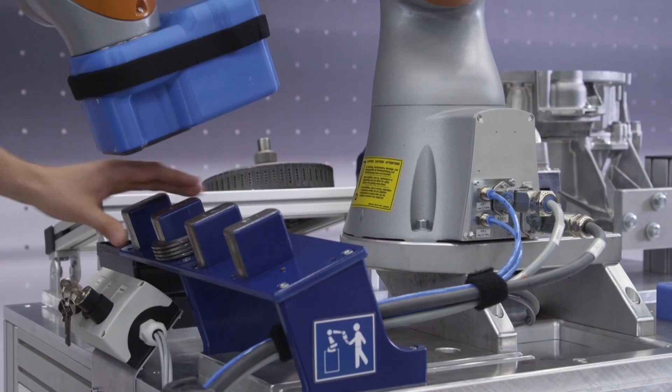Industry 4.0 explains itself. We are facing almost revolutionary change in the industry. All big trends in the automotive industry are already driven by or are driving digitalization.

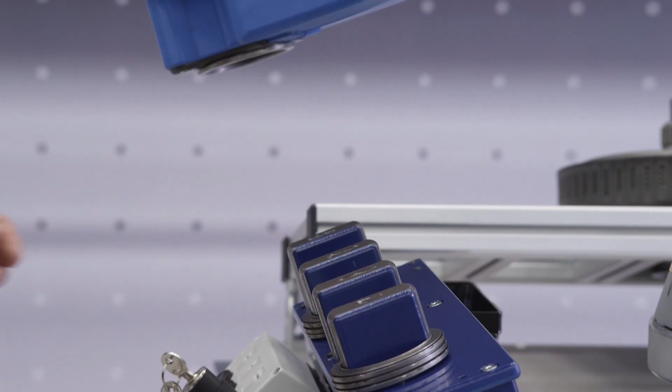Our goal is to be the leading and most innovative automotive manufacturer in the world with respect to digital technologies, and to achieve the digitalization of the entire value chain from design and development through production, where the term originates, and up to sales and service.

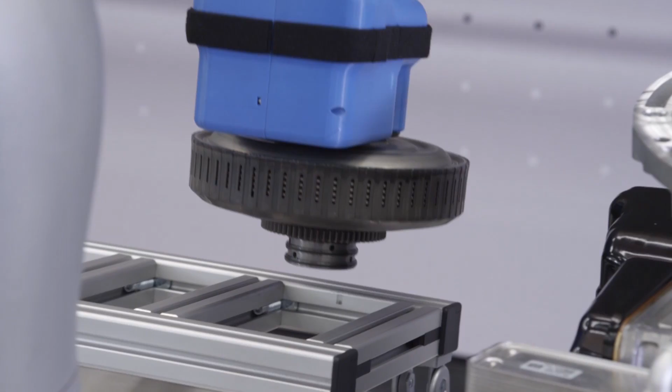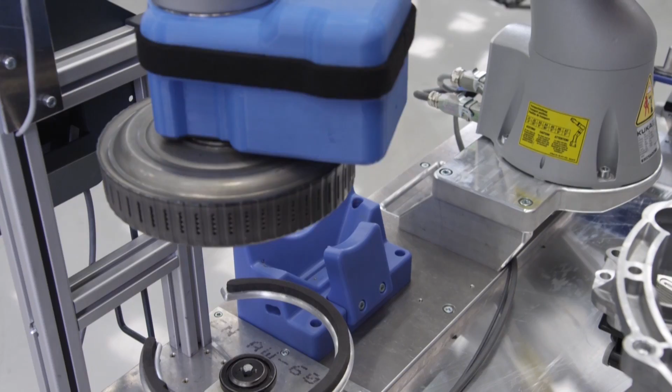The potential of the digital revolution is massive. If people, machines and industrial processes can connect intelligently, individual products can be created to a higher level of quality and more quickly. Production and manufacturing costs can be structured competitively.

We are striving toward a smart factory that offers a high level of adaptability, resource efficiency and ergonomics. And when it comes to digital technologies, we want to be the world's leading and most innovative automotive manufacturer.

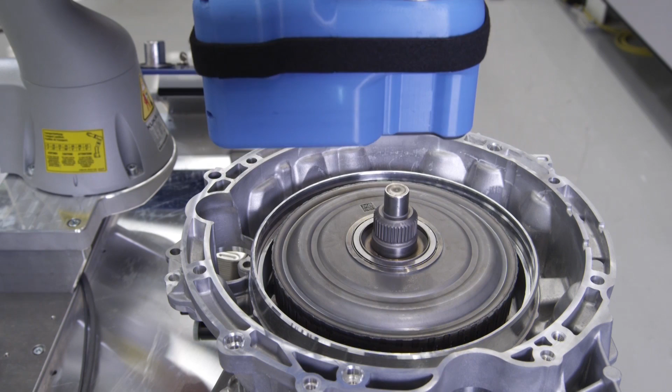In intelligent production, the adaptable manufacturing system will play a key role and will require innovative work models as to how people and robots work together. Today, an assembly step is generally performed either by employees or by robots, which are placed behind protective fences for safety reasons and can be used in other areas of production only with a great deal of work effort.

In the future, we will use real cooperation between robots and people, but with people always in control. The direct cooperation between people and robots enables combining the cognitive superiority of people with the power, endurance and reliability of robots most optimally.

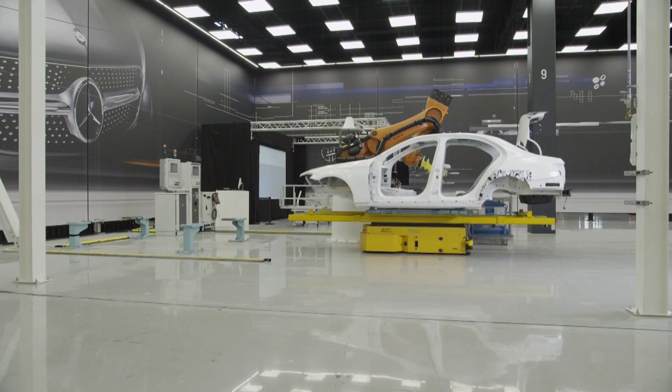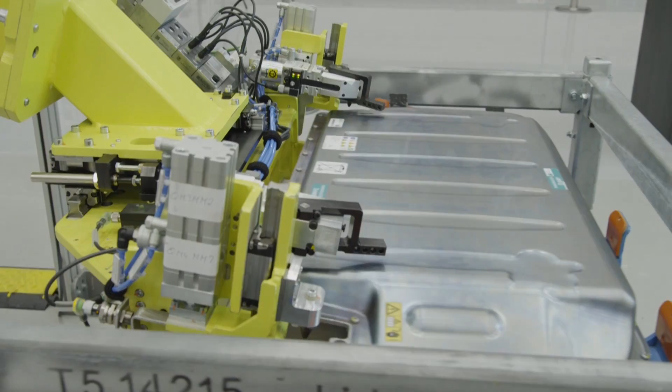Industry 4.0 offers many chances, not only for the company as a whole, but also and particularly for our employees. They are the main focus. People's experiences, creativity and flexibility will still be indispensable in many areas of automotive production. The factory of the future will in no way be without people.

On the contrary, we will expect that there will be new tasks and profiles for our employees and also new products for our customers.

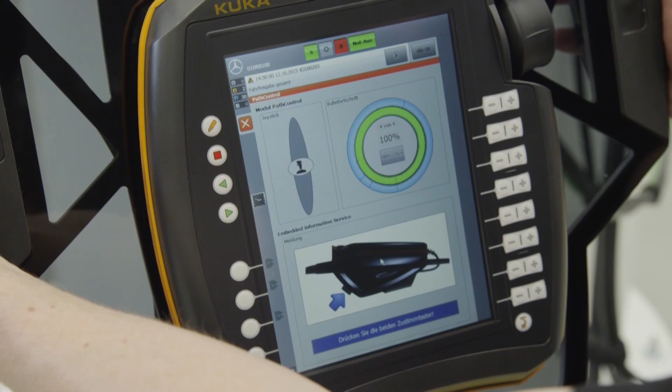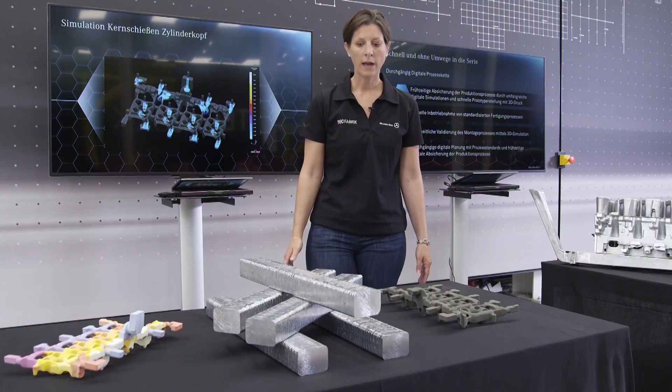Here we have the digital process chain for the powertrain. So we simulate the core shooting process for the sand cores. We need the sand cores for the water cooling system in the cylinder heads. So this is simulated and optimized in the whole simulation before the first hardware is coming.

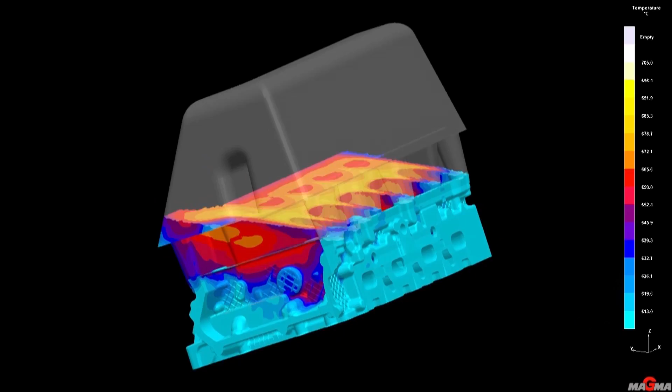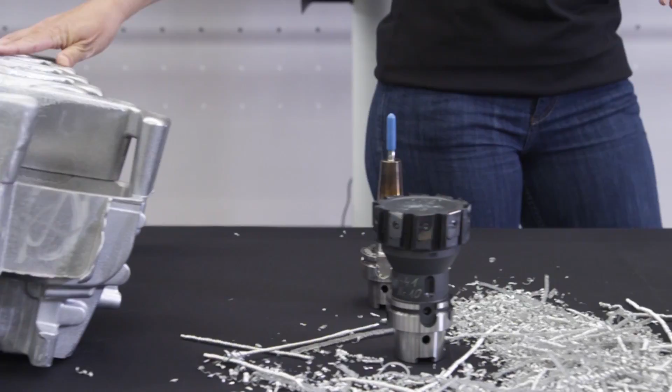So also the cast process is simulated, the whole process there with the cooling down system and everything that belongs to that part. So the raw part getting a ready part for the machining part. So there's the simulation first.

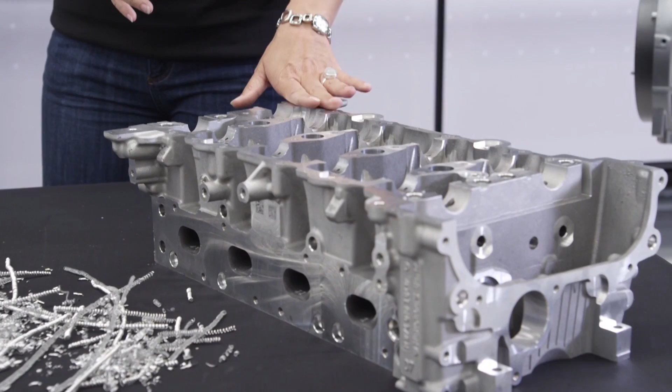Also, the assembly of the engine is simulated, also the complete process with the right parts in the right row, and the ergonomical types of the employees with assembly is also simulated before we get to the first parts in the assembly line. In the assembling planning, we are starting with a virtual planning phase.

Then we go into the physical realization. With Aura, or augmented reality apps, we melt both worlds. And this is what it looks like.

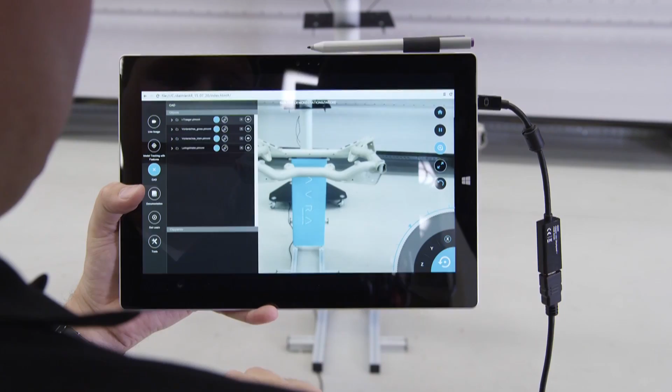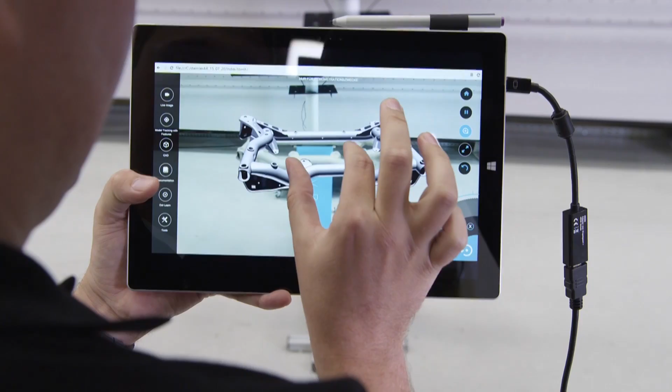To melt both worlds, we need a registration between physical and virtual world. To get this registration, the user has to load virtual parts that he sees in the real world and place it similar to the real parts, just like this. And as you can see right now, it snaps automatically into its position.

And from now on, we have a registration between both worlds. And now we can switch between them, for example, for analysis aspects like this.

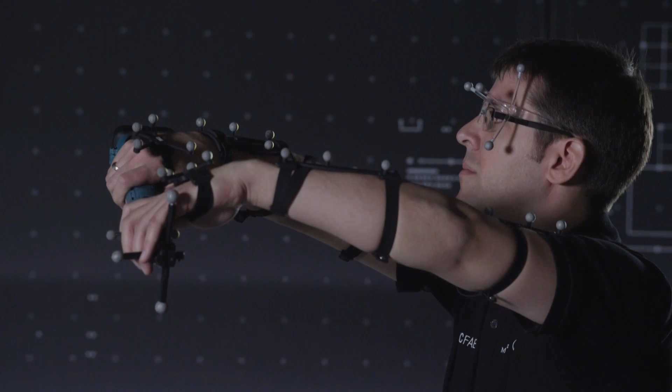Integra Portal has access to all the production equipment from Mercedes-Benz plants around the world. We are able from Europe to support colleagues, for example, in Tuscaloosa, Alabama. If there is a problem in the equipment, we can support with experts from Germany.

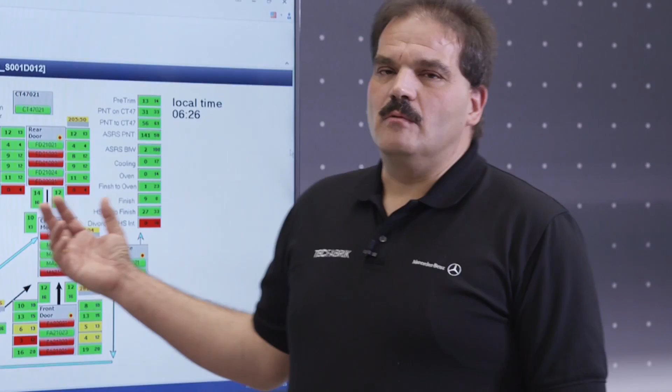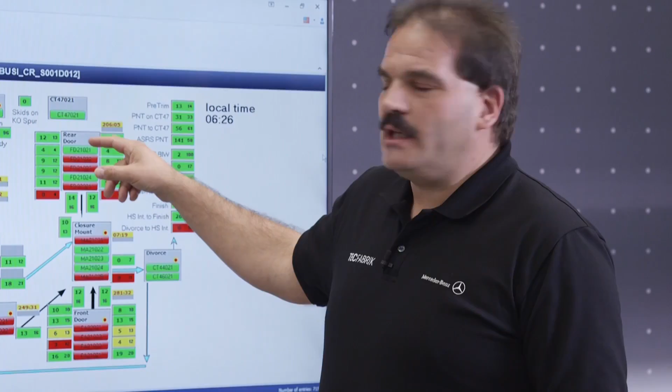This screen shows the overview about a body shop in Tuscaloosa. We identified one issue with a production line at the rear door, and now we go deeper and make the diagnostic about the failure in this line.

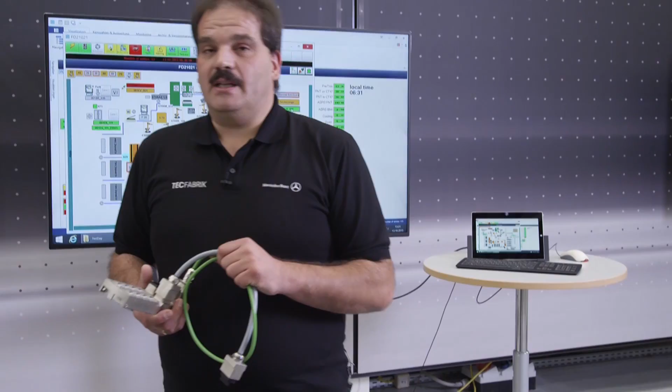This screen shows the overview about this production line. We identified a failure at this point. Due to our seamless communication, we identified an issue with this module in Tuscaloosa. Integra Portal gives us the opportunity to support people around the world with experts from Germany.

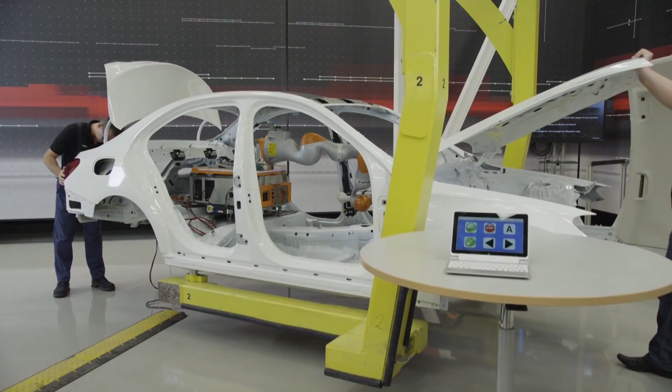The Smart Factory provides the core platform for the digitalization of the entire company. With the Smart Factory, production is able to react even more rapidly to global market fluctuation as well as respond to more specific customer demand.

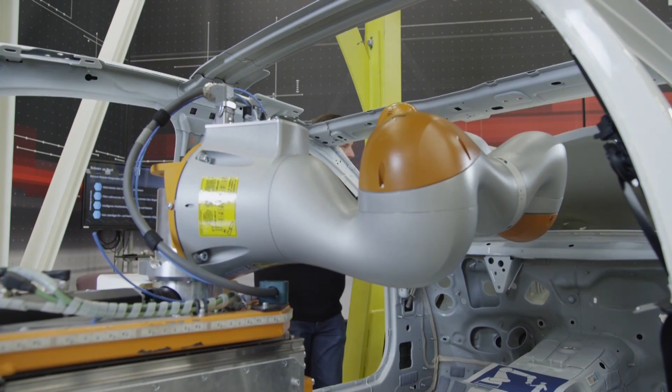So it requires a broad-based digital process chain from development to production. We are already in a position to perform digital simulation of the manufacturing process from the press shop to the final assembly. In this way, for example, it can be checked in the virtual assembly whether the ergonomics of the plant workers are optimal long before the series start up.

And when the production is launched, we will continue the digital documentation of the real factory in the next step. In the future, an image of the real factory will be maintained in real time as a digital twin.

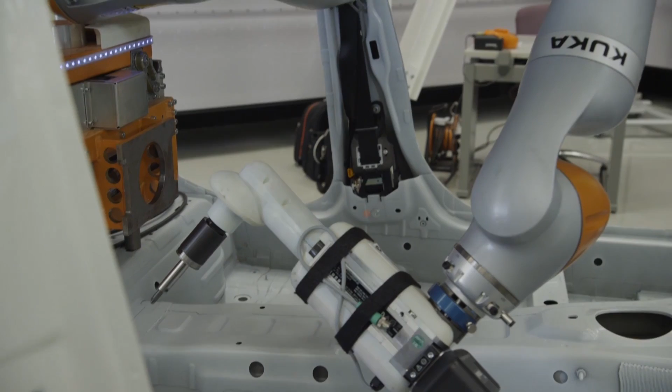A requirement for a 360-degree connected production system is that all machines speak the same language. That is why we are using the control software Integra at Mercedes-Benz worldwide and on a uniform basis. Sensors and machines communicate via Integra in the same way as production management and all suppliers and systems partners.

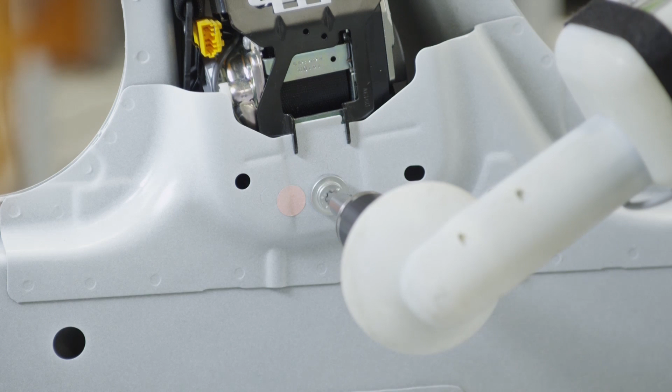Driverless transport systems enable the optimization of many internal plant processes, for example the supply of the workstations with the required parts. We are already using fully automated driverless order pickers in production. They provide that employees with a prepared basket which is delivered just in time and exactly fits the current assembly order. The advantages are better ergonomics at the workplace, shorter walking distance, higher quality, and lower accident risk.